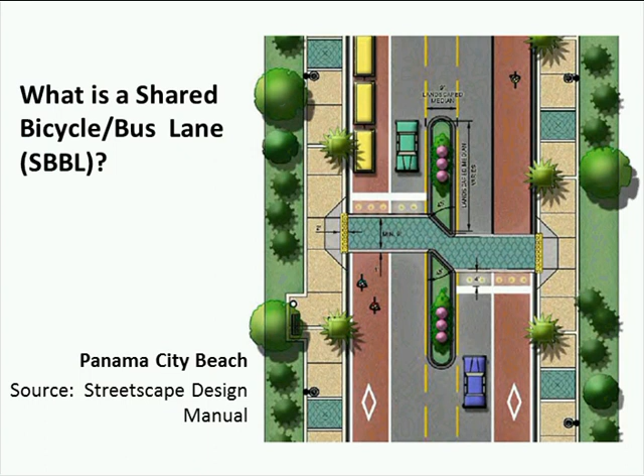And in this slide you see, out of the Streetscape Design Manual of the City of Panama City Beach, a concept for a planned facility, a shared bike bus lane. And so local governments want to find low-cost ways to improve the desirability to use public transit and to bicycle without road widening. We found that shared bike bus lanes are less common in the United States than in the United Kingdom. The UK has extensive bus lane networks in many of their towns and cities, and bikes are allowed to use the bus lanes.

There are other countries that have them, including France, Denmark, Ireland, Australia, Canada, and several others. We found that shared bike bus lanes function in different settings. For example, central business districts, suburban areas, university towns, and oftentimes towns with tourist attractions. We looked for studies, research that have evaluated shared bike bus lanes, and we found very few that have evaluated their safety and effectiveness. And then lastly, transit agencies tend to be brought in after the fact with regards to planning the shared bike bus lanes. They tend to be more in a reactive mode.

So our presentation objectives here are to share some findings on what available guidance is out there in the United States and in municipalities, talk about some general characteristics of existing shared bike bus lanes, share 4 case study examples, and these are from Minneapolis, Philadelphia, Ocean City, Maryland, and Washington, D.C. Talk about some key considerations for shared bike bus lane design and operation, and then talk about some recommendations for further research.

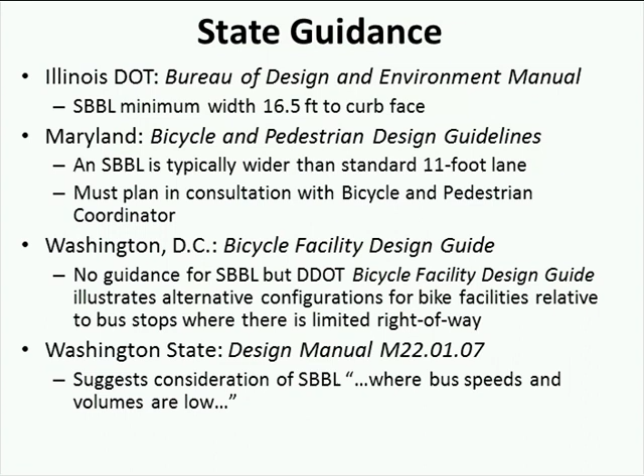Municipal guidance is also available in a few places and provides a little bit more detail, tends to specify minimum and preferred lane widths, may specify conditions where appropriate. In more than one place we found a statement that was something like, shared bike bus lanes should be implemented only where insufficient width for separate bike lane and separate bus lane is available.

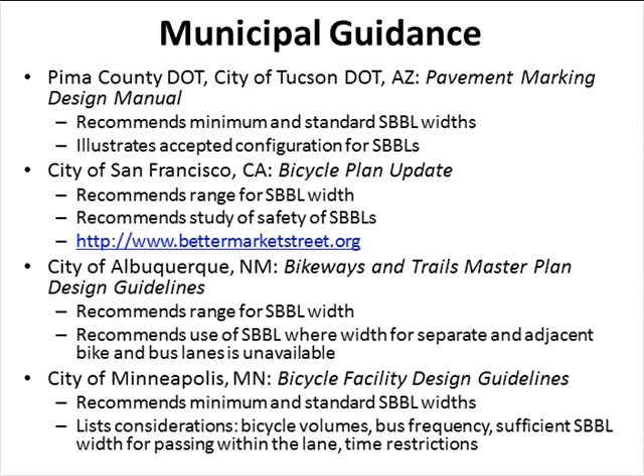We found 27 examples of existing shared bike bus lanes in the U.S. that conformed to our working definition of what a shared bike bus lane is. And we also found a number of others that didn't quite conform to our definition. We found a few that are in the planning stages, one that used to exist and then was removed. The earliest still in use is located on Coastal Highway, which is Maryland State Route 528 in Ocean City, Maryland, and I'm going to talk a little bit more about that later.

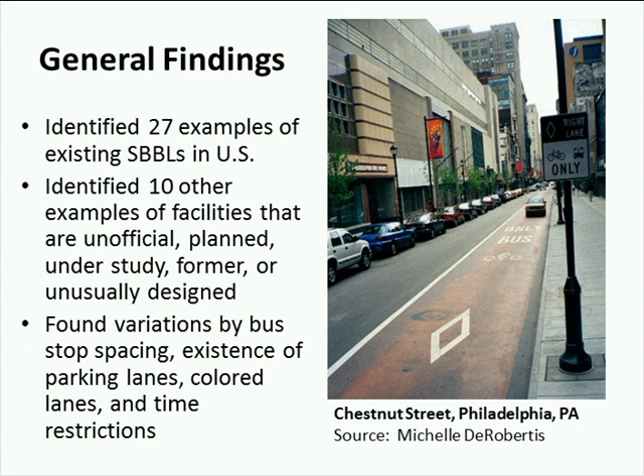Half of the shared bike bus lanes were established in the last 10 years. Two of the locations have colored pavement for their shared bike bus lanes, and in the photo here you see Chestnut Street, Philadelphia. 18 out of the 27 shared bike bus lanes operate on lane width of 13 feet or less, and the speed ranges for these facilities were between 20 and 45 miles an hour. We found two locations where during the off-peak travel periods, the shared bike bus lanes allow on-street parking. That's in Seattle and Denver.

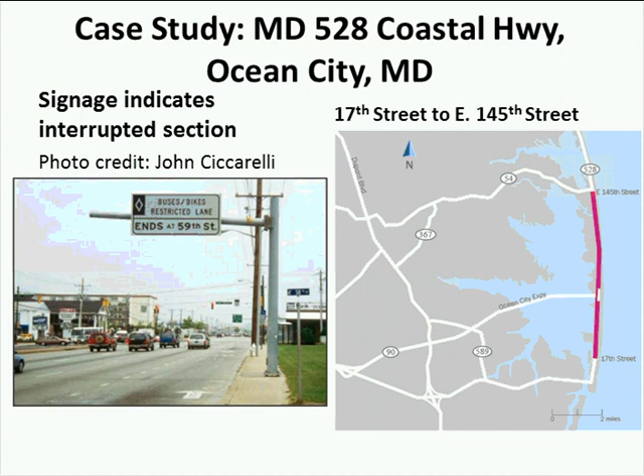So this city is a little bit more than 7,000 people in the winter, but then it balloons to over 300,000 people in the summer season. They have special events, lots of traffic congestion, and then, of course, illegal users that want to use this lane capacity. It's an 8-lane divided highway. There's 3 general purpose lanes in each direction with a combined shared bike bus right turn lane adjacent to both curbs. This facility has curb and gutter, and there are sidewalks that are directly adjacent to the shared bike bus lane that are between 4 and 6 feet wide.

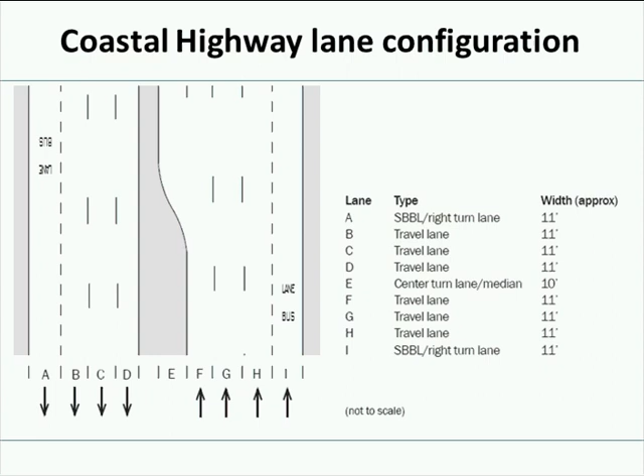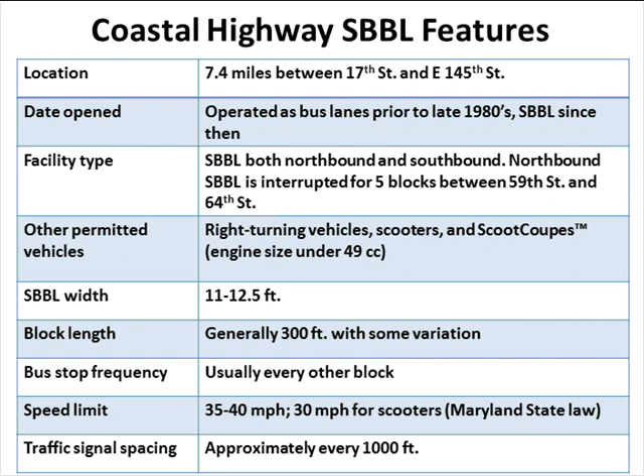And here's a few more details. Buses run year-round in this town, 24 hours a day. In addition to the right turn vehicles, they also allow scooters and ScootCoupes, which are the 3-wheel vehicles. By Maryland state law, these types of vehicles must operate less than 30 miles per hour. This facility also experiences pedestrians, other illegal users. Pedestrians tend to walk out into the lane because the sidewalk is right there. There's also a lot of joggers and rollerbladers.

A second example is in Washington, D.C., 7th Street and 9th Street Northwest. They operate as a pair. 7th Street goes northbound, 9th Street goes southbound.

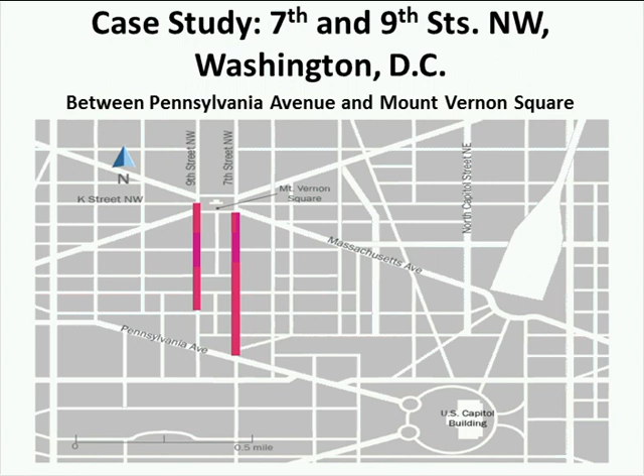Heavy commuter traffic, and in addition to that, by virtue of its location, lots of visitor, tourist traffic, and of course the visitors and tourists, they don't know where they're going, so that compounds the congestion. In 2003, 7th and 9th Streets were redesigned for a new bus circulator, and then they allowed bikes to use this facility. 9th Street switches every other block using 2 different types of configurations.

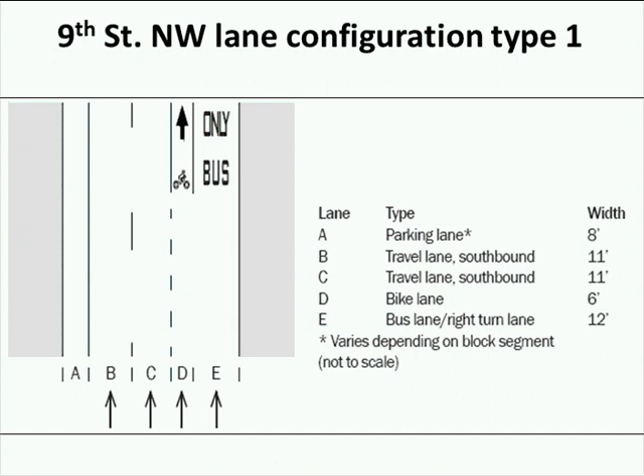The first type, every other block, it's one way, shown here, with 2 general traffic lanes, southbound, separate bike lane, separate bus lane, and 1 parking lane. And here you can see enforcement is a problem. The cars in the bus-only lane.

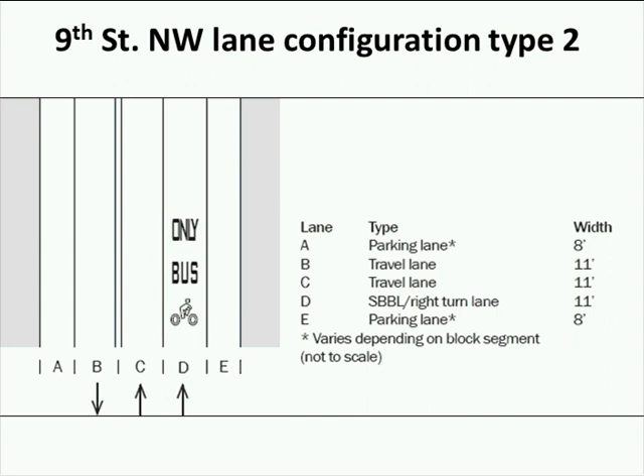And then the alternating blocks, it shifts to 2-way traffic, 1 general traffic lane in each direction, and a southbound combination shared bike bus right turn lane with parking on both sides. And 7th Street Northwest is also this same configuration, only going northbound. There's a high demand for street space, as you can see here. In addition to the bus circulator, there's many other bus routes that use this facility.

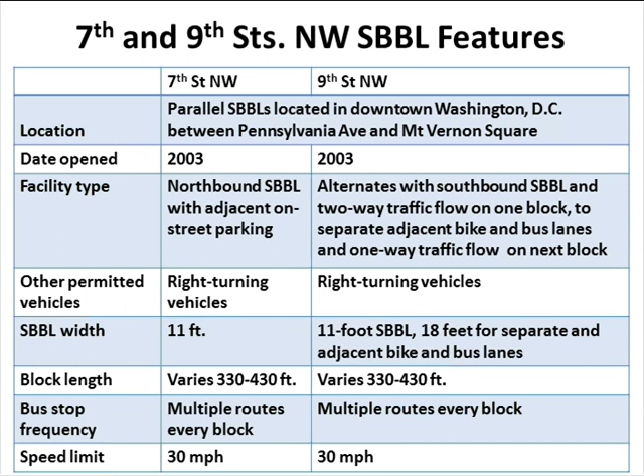They have lane markings at the beginning, midpoint, and end of most blocks along this. Wide white solid lines become dashed where there are conflict zones. And here's a few more details. General consensus amongst staff of the district DOT, and also Washington Metropolitan Area Transit Authority and bicycle organizations in that area agree that the shared bike bus lanes don't function very well, and it's primarily due to so many illegal users on the lane.

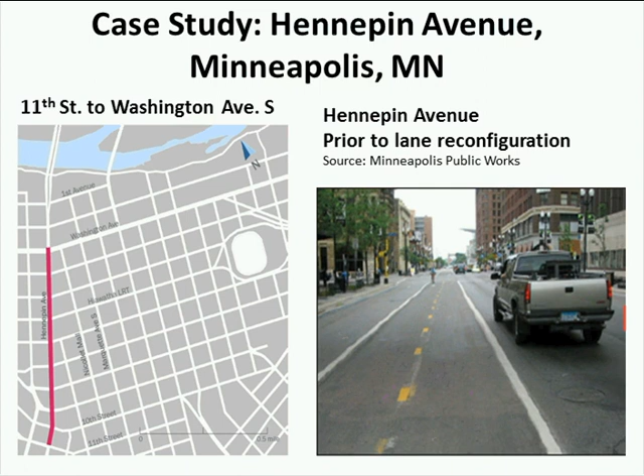A third example is a 9-block stretch of Hennepin Avenue in downtown Minneapolis. Between 1994 and 2009, it operated, as you see in the right-hand photo, 3 general traffic lanes one way with a contraflow bus lane and a 2-way bike lane in between. As part of a plan to improve downtown circulation and access, in 2009, Hennepin Avenue was converted to 2-way operation with combined shared bike bus right turn lanes on both sides.

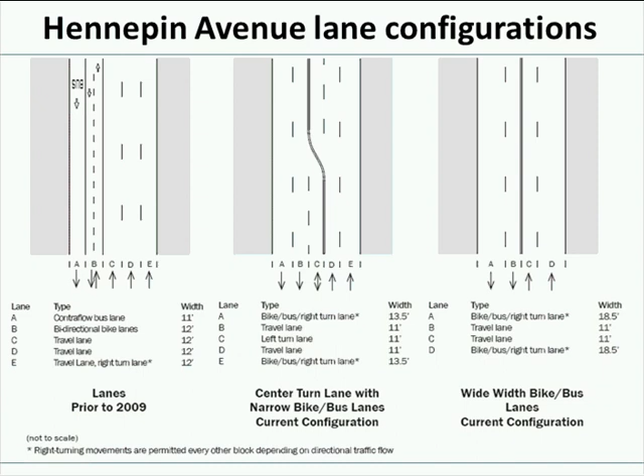Public Works Department in Minneapolis evaluated the streets before and after the 2-way conversion, and what they found was that general traffic remained constant at about 20,000 vehicles per day, but there was also an increase in cross-street traffic. With regard to bike traffic, they measured a decrease from 1,190 to 990 bicycles per day.

But also during this two-way conversion process, there had been some other design changes made to adjacent streets. So it's a little bit hard to draw clear conclusions about the impact of the shared bike bus lanes. They did find area-wide bike counts showed that overall there was an increase in bicycle traffic by about 43% in the immediate area.

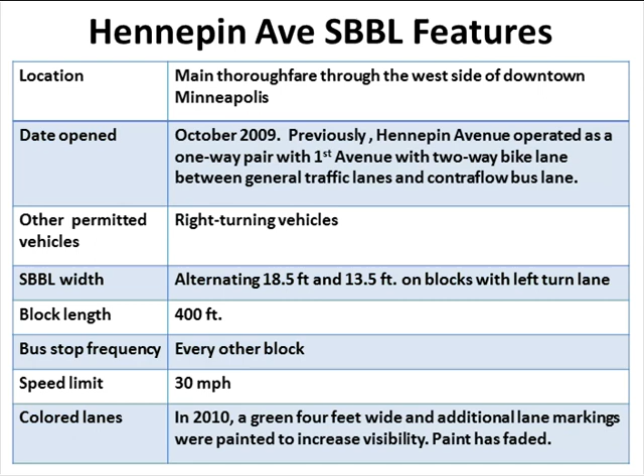Public Works in Minneapolis received a number of complaints from bicyclists about the shared bike bus lanes after they had been installed. The complaints had to do with the pavement markings not being visible enough, the many illegal users, the thought that perhaps the shared lane markings in the lanes might be part of the cause of motorist confusion, and so motorists tended to use the lanes illegally.

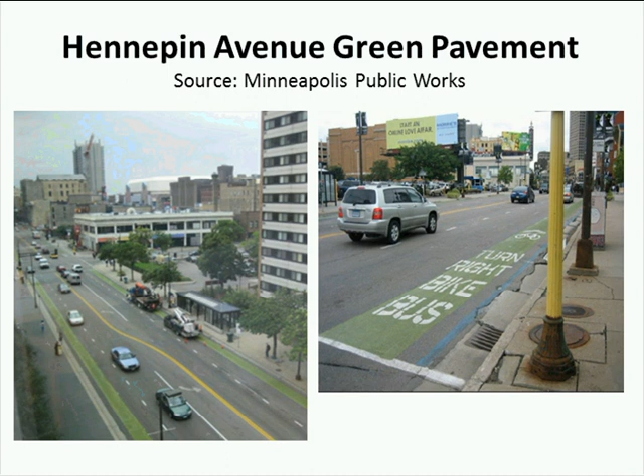So FHWA granted approval to Minneapolis to experiment with 4-foot wide green painted lanes, and the green paint extended 3.5 feet away from the curb. The paint does not extend into the intersection, and then they also enlarged the pavement markings.

And so Public Works did a follow-up study to see what the effect of the green pavement was on lane position of the lane users, and they found that with regard to bicyclists, in those blocks where the shared bike bus lane was 13.5 feet wide, 80% of the bicyclists rode within the green pavement area. But where the shared bike bus lane widened to 18.5 feet wide, it increased to 93% of the bicyclists riding within the green pavement.

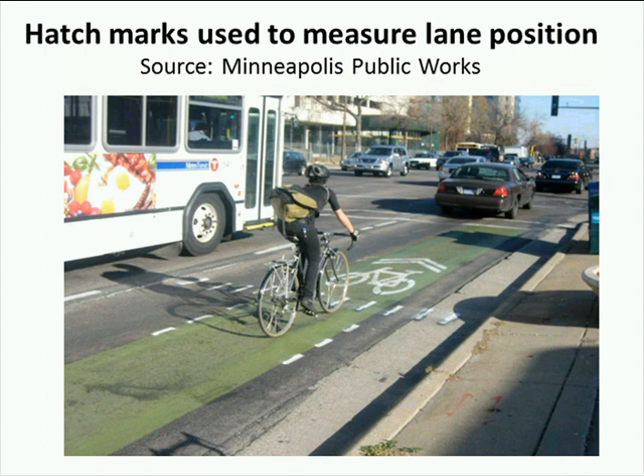In the narrower blocks at 13.5 feet, both motorists and buses tended to ride farther into the green pavement area. Also, bus operators rode farther into the green pavement area when they were approaching bus stops, which makes sense. And they also found that both buses and motorists tended to ride farther into the green pavement as they were approaching intersections.

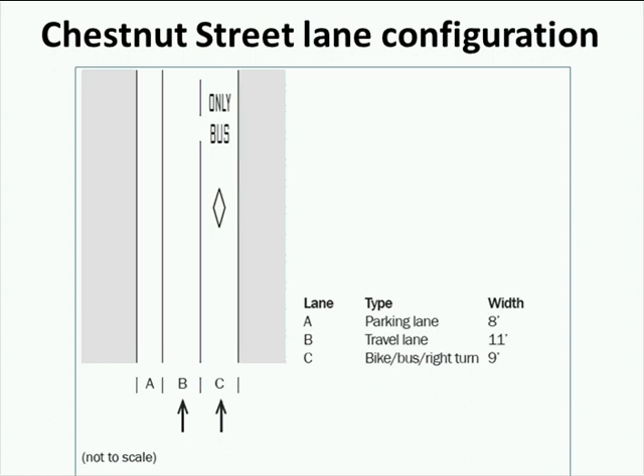Here's a fourth example, Chestnut Street in Philadelphia. It used to be a two-way busway, but businesses in that area had been complaining about noise and diesel fumes driving away business. And so they converted Chestnut Street to a one-way eastbound with, as you see here, one parking lane, a general traffic lane, and then one combination shared bike bus right turn lane. Now, Walnut Street to the south operates westbound and has a separate bike lane.

Chestnut Street was our example that had the narrowest shared bike bus lane at 9 feet wide. This street has high traffic volumes. There's a lot of retail in the area, so there's a lot of delivery trucks. There's 3 universities in the area.

Originally, right turns had been prohibited to use the shared bike bus lane, but the public complained, and so that prohibition had been lifted. There's lots of pedestrian traffic in the area, high volumes of pedestrians, and as a result, the right-turning motorists yield to the pedestrians, and that tends to stop traffic in the shared bike bus lane.

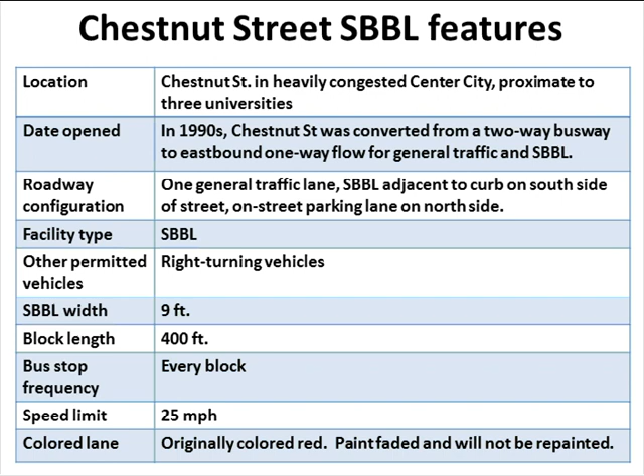The Delaware Valley Regional Planning Commission partnered with SEPTA and PennDOT to do a study about interactions between bicyclists and buses. And this study was actually done on Walnut Street that has the separate bike lane, but we felt that the observations that they made about bike-bus interaction would likely also apply to shared bike bus lanes as well.

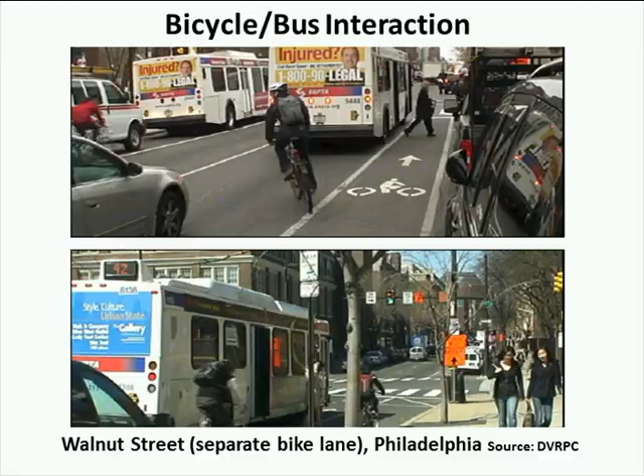The top photo that you see there shows the bicyclist preparing to pass a bus to the left, and doing so requires finding a sufficient gap in traffic to safely pass the bus this way. The bottom photograph shows a common problem where bicyclists are trying to pass on the right, and bus operators are trained to pull over as far to the curb as possible to prevent this, but oftentimes bicyclists still attempt to pass the bus on the right side. And so this is a problem that we find everywhere there are shared bike bus lanes.

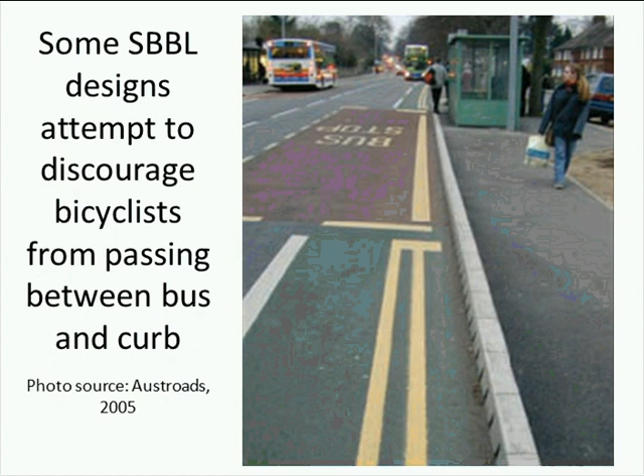Some shared bike bus lane designs try to discourage bicyclists from passing between the bus and the curb. This photograph is from Australia, where people drive on the left side, and so the traffic is coming toward us. Here you see pavement markings that communicate to the bicyclists not to enter past the yellow line when there's a stopped bus. So that's one potential design.

In addition to the bicyclists passing stopped buses between bus and curb, there were two other main problems cited by all these different examples. One was enforcement of the shared bike bus lane exclusive use, as well as large volumes of right-turning vehicles in the shared bike bus lanes.

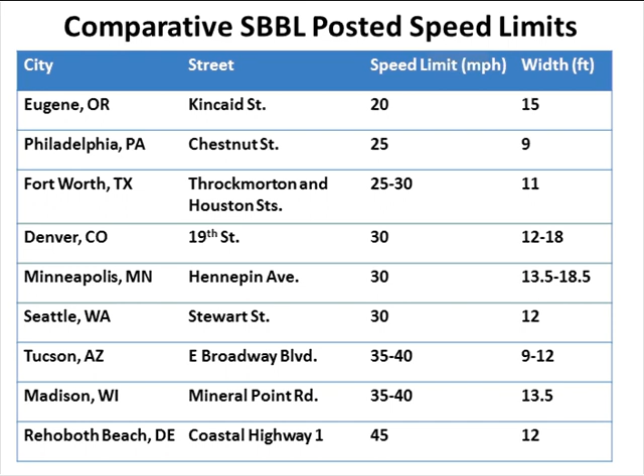Determining safe operating speed is another big topic of interest relative to lane width. In this table, we share a number of examples of comparative posted speed limits on shared bike bus lanes. Now, one would expect wider width with higher speeds, but what we actually found were examples of wide width shared bike bus lanes operating at lower speeds, as well as other facilities that operated with a narrow width but at higher speed. And then we found everything in between those two extremes.

Another consideration regarding motor vehicle speed and width is the bicyclist getting caught in the draft of heavy vehicles, including buses. The force increases the closer the bus is to the bicycle and the faster that the bus goes. And so this might be an issue for shared bike bus lanes on perhaps arterials where there are higher speeds.

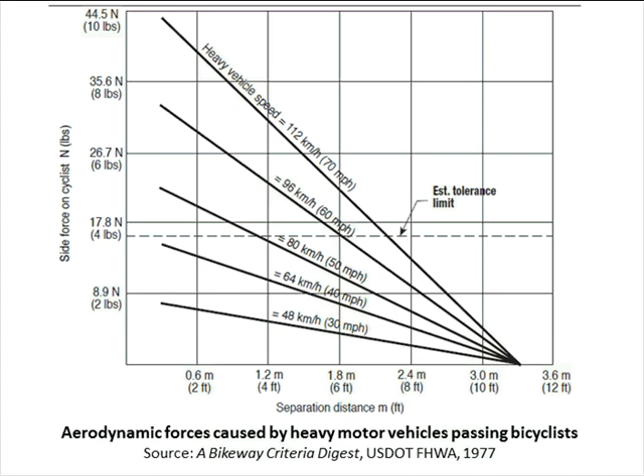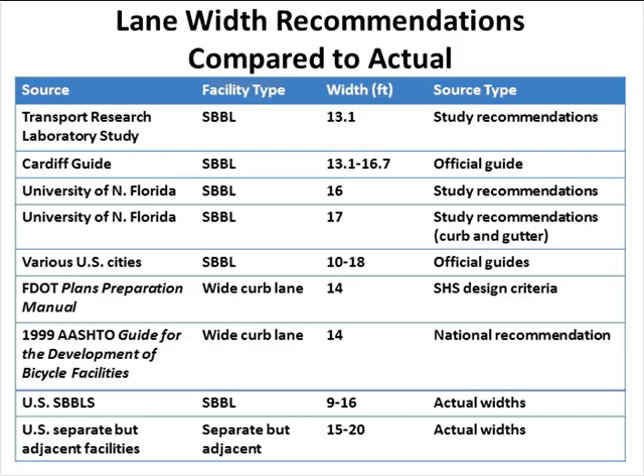It's important to note here that this and the other bus stop treatments that I show here do not reflect any official guidance or standards. They're not in the Manual on Uniform Traffic Control Devices. These are simply descriptions of potential scenarios based on available lane width.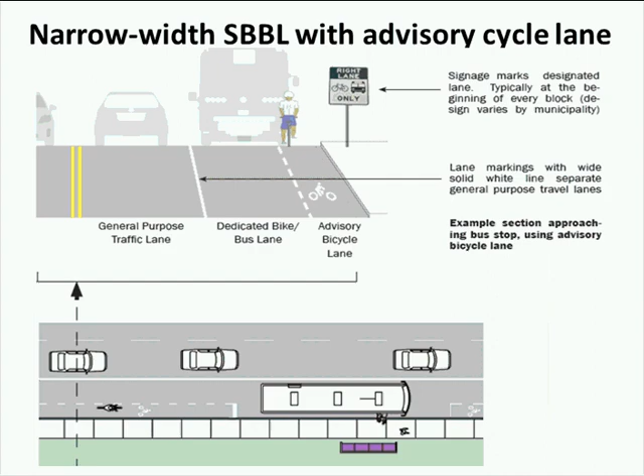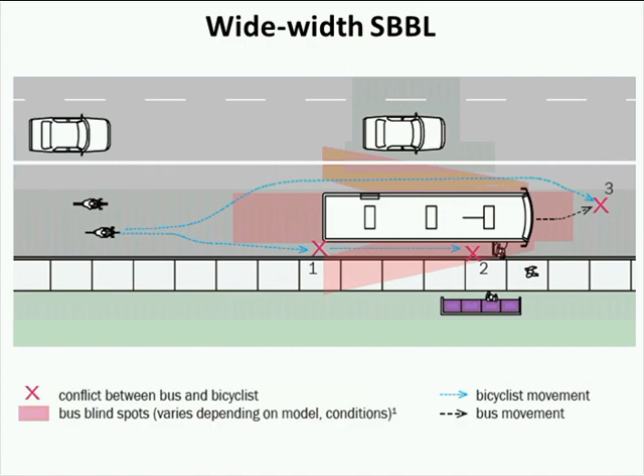Now, how much lane width is needed to accommodate safe passing while in the lane? So we decided to do an exercise to get some idea of this. And so this diagram illustrates what the necessary width requirements would be under conditions where there is curb and gutter, operating speeds of buses are 30 miles per hour or less, lateral clearance of at least 3 feet between a bike and a passing motor vehicle, and sufficient width for a public transit bus of standard width, and that's 8 feet 6 inches in the United States, to pass a bicyclist while staying within the shared bike bus lane.

And this width includes 3 feet 4 inches of width of the bicyclist operating space. It's measured from the longitudinal joint of the gutter pan. There's another 3 feet measured from the edge of the bicyclist operating space to the bus body, and that's added per requirements of Florida state law. And then an additional 8 feet 6 inches represents the width of a standard public transit bus.

There's an additional width of 1 foot 9 inches. It's measured from the left edge of the bus to the middle of the 8-inch wide solid white stripe that separates the shared bike bus lane from the adjacent general traffic lane. And this additional width was computed by assuming that the bus is centered in the lane, so positioning the bus in the center of 12 feet of operating space, and that's the recommended width of a lane for public transit buses.

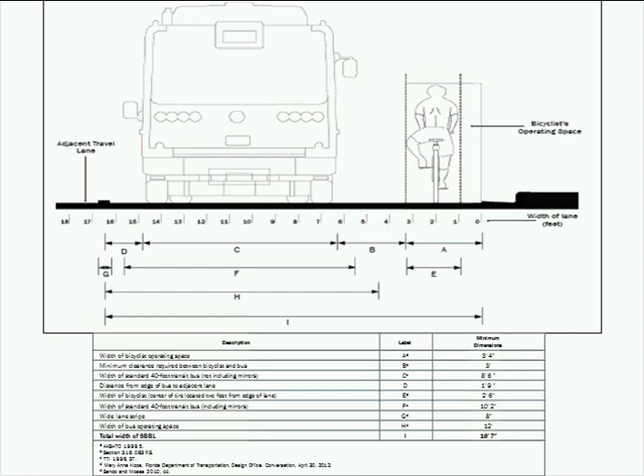So the 4 widths, and you see in the diagram, A plus B plus C plus D, total 16 feet 7 inches when you add those all together. And this is not much less than if you have a separate 5-foot bike lane and a 12-foot standard lane for buses. So this was just an exercise to see what kind of space might be required for safe passing. This would require some more research.

A third option is a narrow width shared bike bus lane with partial bus bay and advisory cycle lane along the left side. So you have additional feet of width at the curb side for the bus to pull over. And here again, one of the reasons why shared bike bus lanes are considered oftentimes is because there's a lack of space. This option would require some additional space.

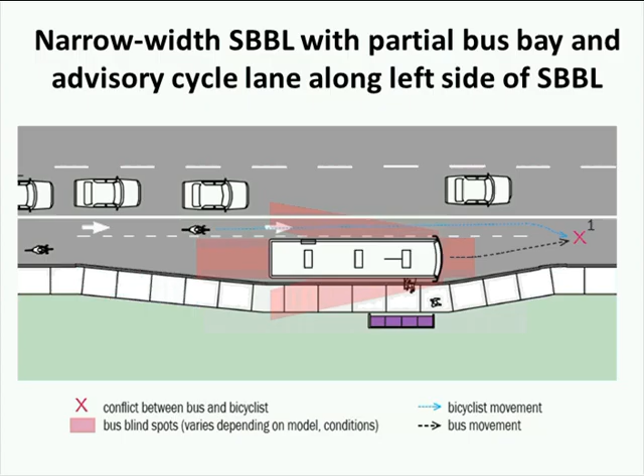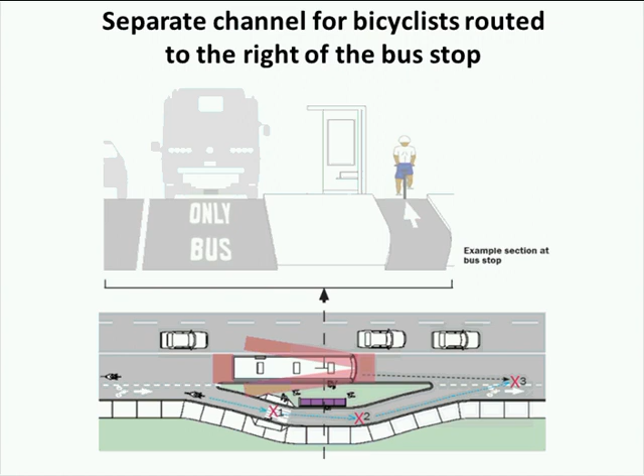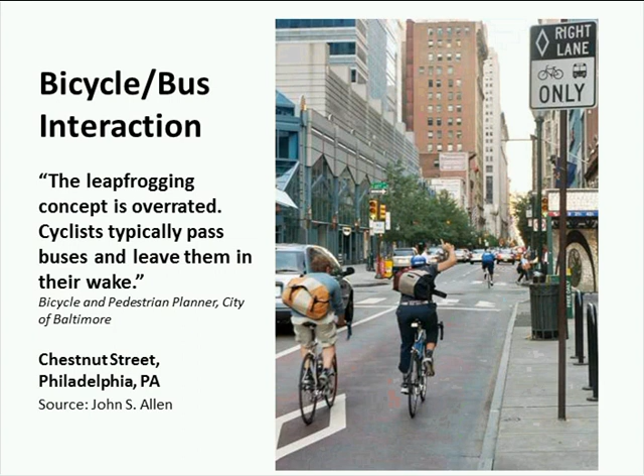One issue that is commonly cited as an anticipated problem of shared bike bus lanes is leapfrogging, where the bus and the bike repeatedly pass each other. And here you see a quote from the bike ped coordinator from Baltimore, Nate Evans. He said that the leapfrogging concept is overrated. Cyclists typically pass buses and leave them in their wake. I suspect that this may be the case in urban settings, downtowns where buses stop at every block and never really pick up speed. It might be more of an issue in suburban shared bike bus lanes.

Here's just a few pointers for bus operator training, because facilities design can't do all of this. We found no training for bus operators specific to shared bike bus lanes, but we found several examples of bus operator training regarding interacting with bicycles in general. And this is a synthesis of several sources.

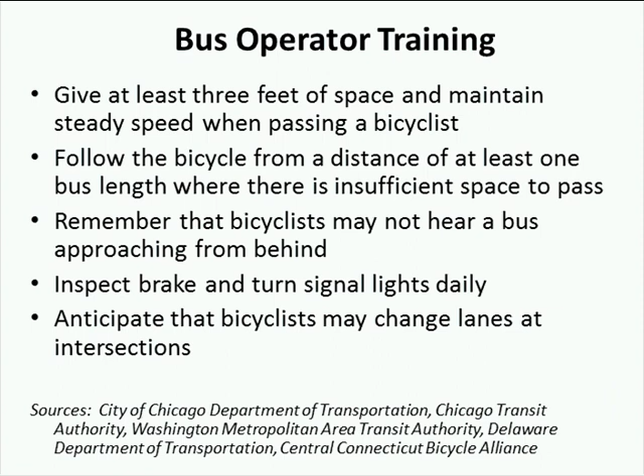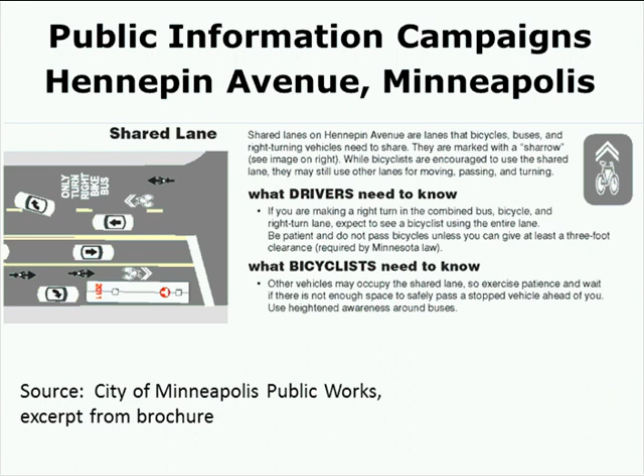And that leads us to some ideas for further research. Marianne, did you want to talk about this? Yeah, we can mention a few of these things. As we were working through this project, what we really learned is that for those bike bus lanes that have been implemented, there's been very little analytical data collected on how well they're performing. And so part of our research effort was to summarize the things that we felt we needed to have more information on. The first one is just the effect of how shared bike bus lanes

encourage bicyclists to use a corridor, or are they attracted to the corridor for reasons that we might not be aware of, and does the implementation of the shared bike bus lane actually increase the number of cyclists who might be using that route, or in fact do they leave? Since we have no data on how many people are using them before and after implementation, we can't say how well they're performing.

And then the next thing is that we identified that there needs to be better ways to collect bicycle traffic count data. For the buses, we could look at the bus schedules and figure out how frequently a bus would be traveling the corridor. But again, we really don't know whether or not these facilities actually encourage or discourage bicycling.